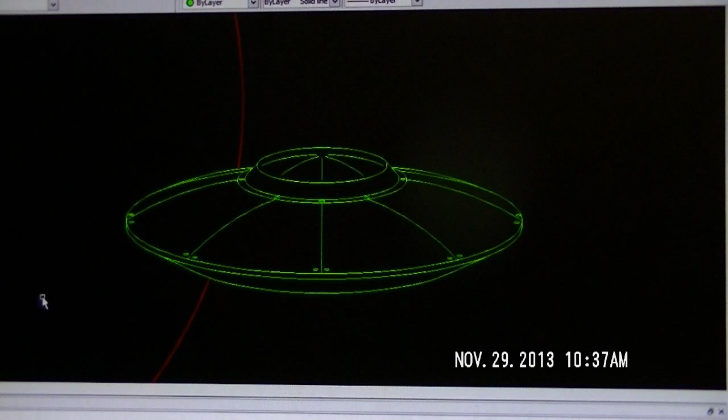And I got these visions of these dual magnetic hemispheres. They're like toroids, counter-rotating. And I got the images of these sacred geometries again, predominantly hexagons. And so when I got out of the dream, I came into my room, where I got my computer and all my design stuff, and I started sketching these designs, and they were based on what I'd learned in the dreams.

And I came to realize that it's possible that the dreams were a message to me. I know that sounds kind of out there, science fiction-ish and stuff, but our planet and our solar system is going through some really weird energy changes, and it's manifesting certain things in people that nobody can explain, and nobody certainly ever expected. And for me, it's always kind of been related to levitation. I can't tell you why.

But I sketched together my first design, which was a live shaft, a live axle, anchored at the bottom and anchored midway with bearings. This green rotor is a plate with neodymium magnets, north side up, south side down, two drive coils which are also on a rotating plate so that they can counter-rotate each other. And in my head, I envisioned these two toroidal shaped hemispheres of magnetic energy, magnetic flux.

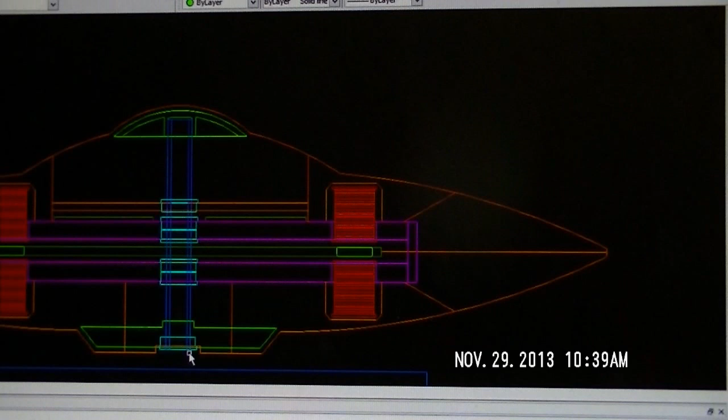I had no way to generate power, and I didn't know how to do it, but I did some research. Brown's levitation theory and that kind of stuff led me to believe that we can take power out of the ionosphere. We can create static, high voltage static electricity. So I incorporated at the end of this live shaft these, essentially they're static generators, north and south, or positive and negative. That Brown's levitation deal is based on potential, the differential in potentials between north and south, or positive and negative ionic energy.

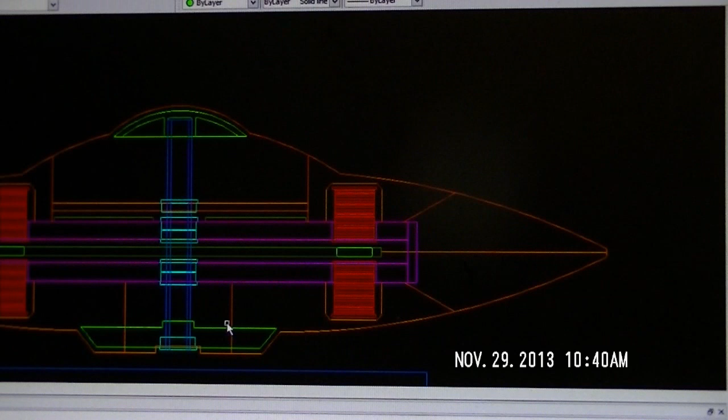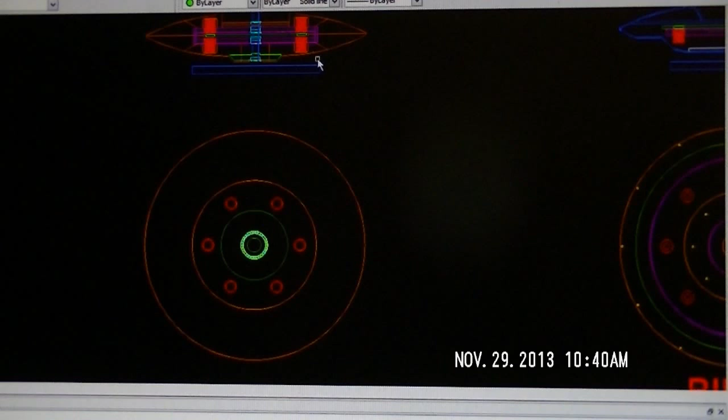So I threw this thing together, and I realized that I got these huge coils, and I had 6. This is the topography up here, and this is the plan view down here. I had hexagon positions, and I have all these coils rotating, huge centrifugal forces, and I need gyro, yeah, but that's just too much rotating mass.

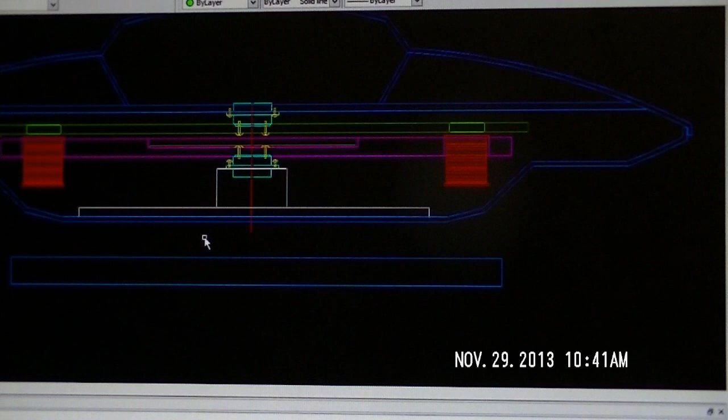So I changed to an 8-point where I had the coils still rotating in one direction, and the upper rotor plate with the neodymium magnets also rotated in an opposite direction. And essentially both of those things will give you 2 opposing toroidal magnetic hemispheres. But then I had no way to generate power in that design.

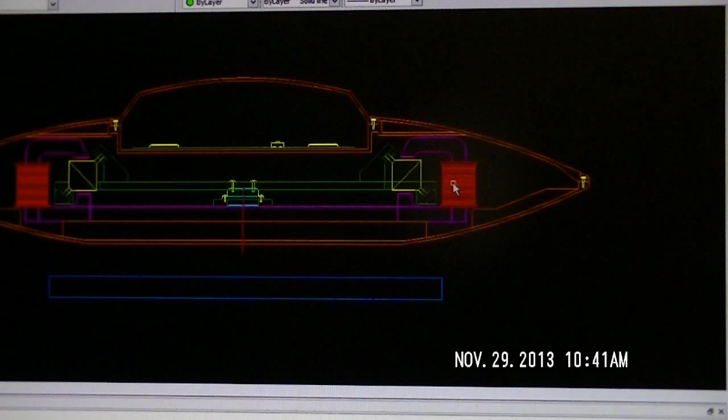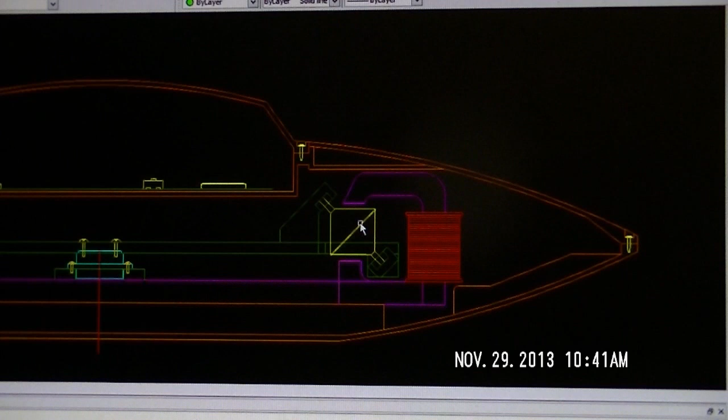I kind of did some more research and came across this guy named Otis Carr, who back in the late 50s and early 60s designed this Utron technology, where he essentially used ring magnets and coils and got this plate to rotate, and these little Utrons, they're opposing conical shaped rotary devices that generate magnetic forces in the opposite direction.

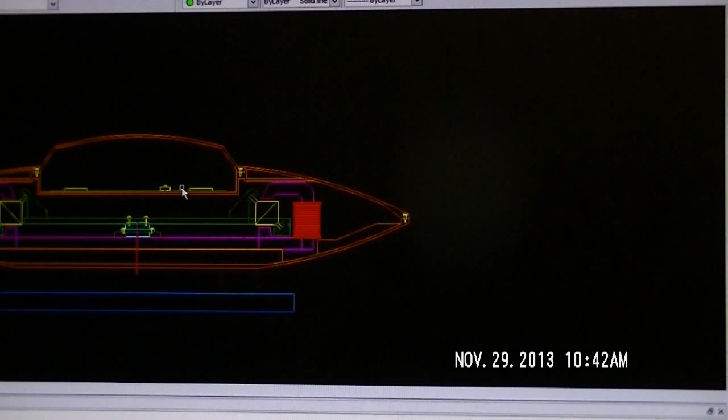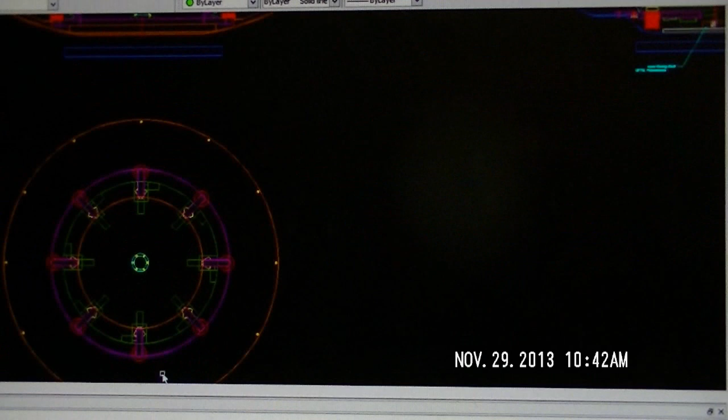And there was nothing concrete with this, and I just felt like I was kind of going down an avenue that I wasn't technically knowledgeable enough to pursue. Not like any of this is really. This is the plan view of it. It has 8 points based on sacred geometries, of course. You can see these counter-rotating Utrons.

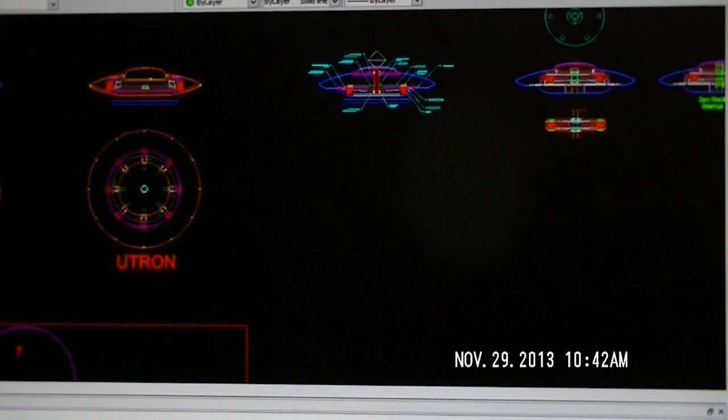Well, these other motors that I've been doing were based on either Bedini or pulse motor technologies. Then I got to this other idea where I had a center rotating mass, and this is to create a gyroscope, which is a stabilizer. If you're going to have a spaceship, you need a gyro. Just about anything, even ships on the ocean have gyros to compensate for the rolling motions of the ocean and stuff.

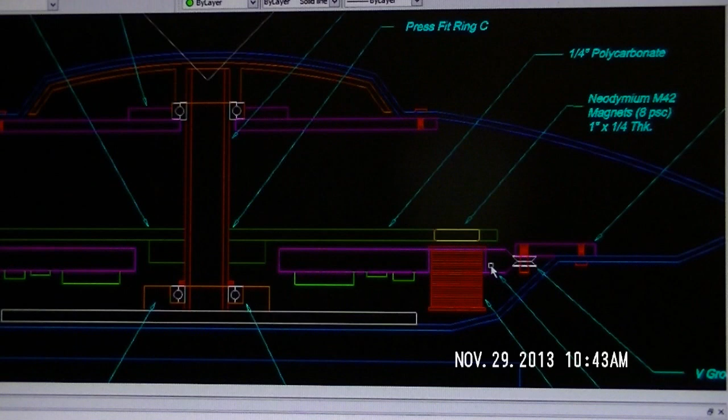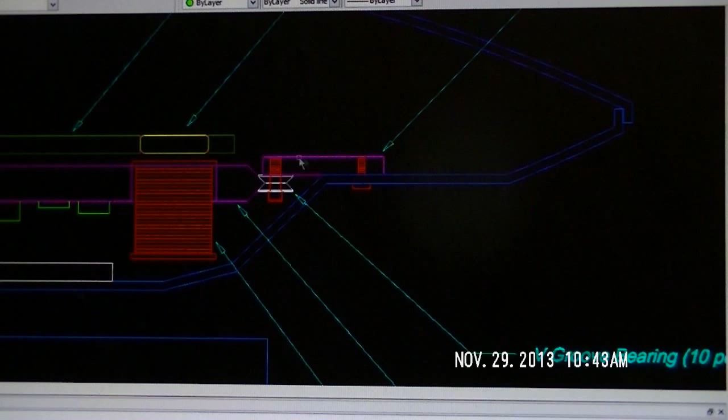I had this one plate as a gyro, and another, the generator coil, was also a rotating mass; it's essentially a big ring. This is a big plate, aluminum plate. This is a ring, I was thinking probably polycarbonate. And then this is an aluminum ring that goes around the whole circumference. And then I have V groove ball bearings that hold this ring, the drive plate coil ring, in position.

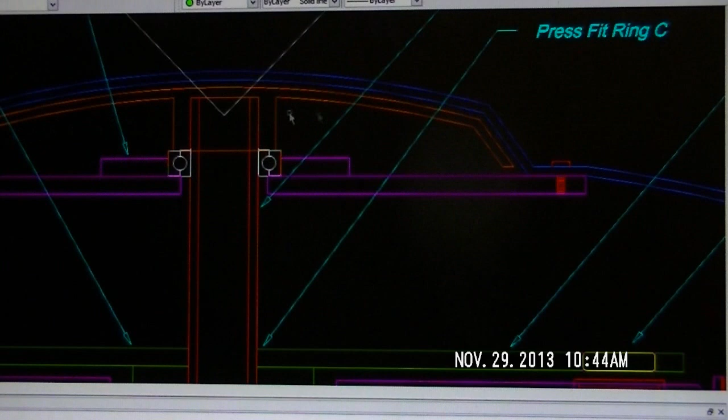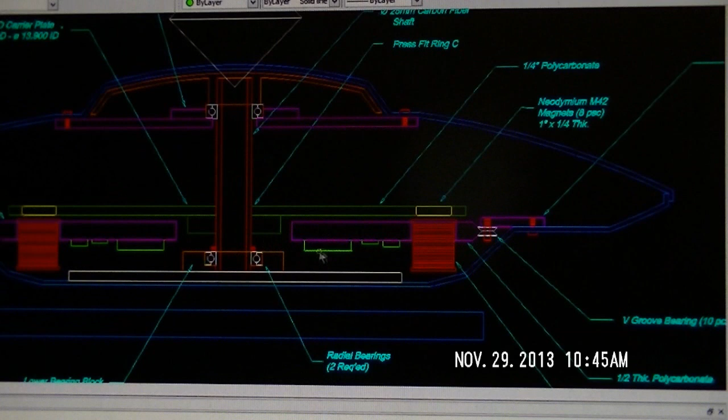And then I have a static electricity generator up on top, and I was thinking about a plate capacitor on the bottom. This is a viable deal, but I think I would probably incorporate a northern hemisphere negative or positive ionic propulsion or static generator to capture ions from the north, and then of course you need a south to generate the current to go into this plate, and then through induction I would somehow get the power to these coils.

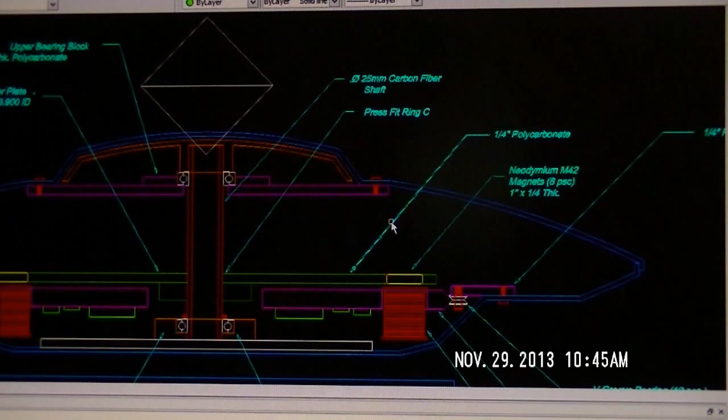This is not a trip, this is a journey, and I've got a lot to learn, and I'm just at the initial stages of putting this stuff together, all based on half-assed theory that I learned through reading and through all the different stuff you find on the internet.

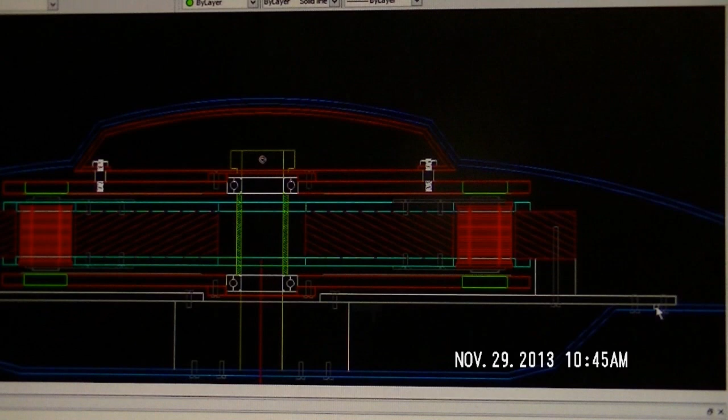And so I gravitated to another design which I thought was a little bit more viable because it gets rid of the rotating mass. I have a single drive plate, which is this red section. It's mounted to the fuselage on a big plate that's in the interior of the ship. On top of that insulator, I have two aluminum plates. And this is a hexagon, so we're back to a 6-point geometric shape. And now I have an upper northern rotating plate based on the northern drive pulse, the northern portion of the coil, and then a counter-rotating southern plate with neodymiums rotating in the opposite direction.

And using this upper large static generator, I was going to try to transfer that static energy into these two upper plates, kind of like plate capacitors, and then somehow incorporate the electronics within this hatched area of the insulator so that I can achieve the proper frequency.

I've come to learn that pyramids were not built as tombs. Pyramids were based on ancient technology, much more advanced than anything we have, because pyramids are actually power generators for advanced civilizations that were here before us. And the very design of these pyramids uses the ionic energy between our ionosphere and Mother Earth, and at a certain percentage of the height of those pyramids, some researchers have recently measured a resonant frequency associated with this energy generation, and it still happens. They still generate the power. The ones in China, the ones in Bosnia, every place they have these pyramids, they still work.

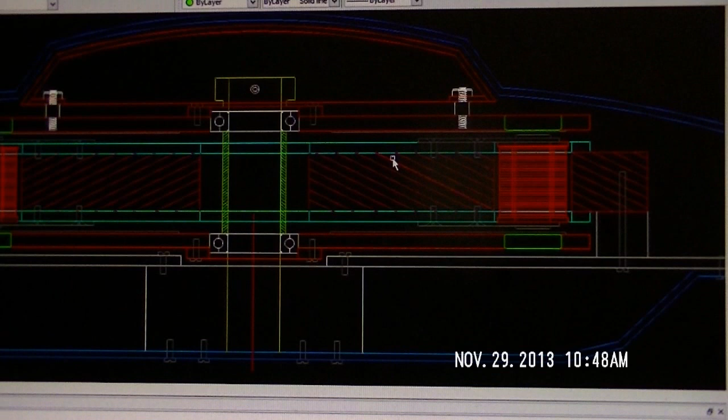They actually had underground rivers flowing through there, and they create this energy. And they measured at a certain point of these pyramids 28 kilohertz. So the resonant frequency of these pyramids activates at 28 kilohertz. So I figured that I would pulse these coils in a dual phase at 28 kilohertz. Of course, that's why I bought a function generator, so that I can play with the frequencies, because just like John Hutchison, when he did the levitation, he used acoustic resonance to levitate and to change matter.

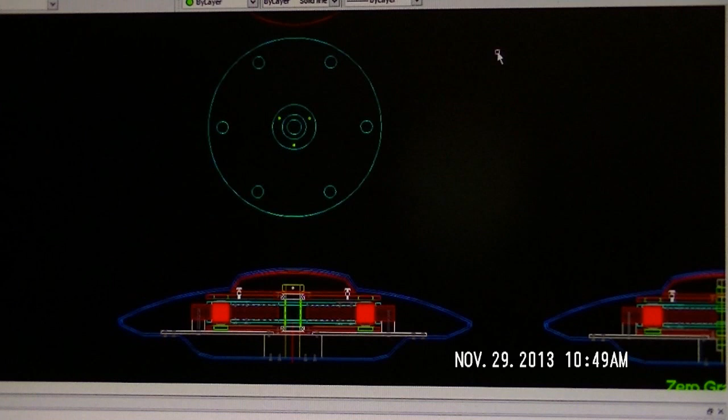So along the same principle, it's possible, I think, to achieve electronic modulation levitation by achieving the resonant frequency of a given mass. Like this whole spaceship would have a combined resonance frequency that, once it sustained that right frequency, would counteract the gravitational force. And that's essentially the theory behind what I'm trying to achieve.

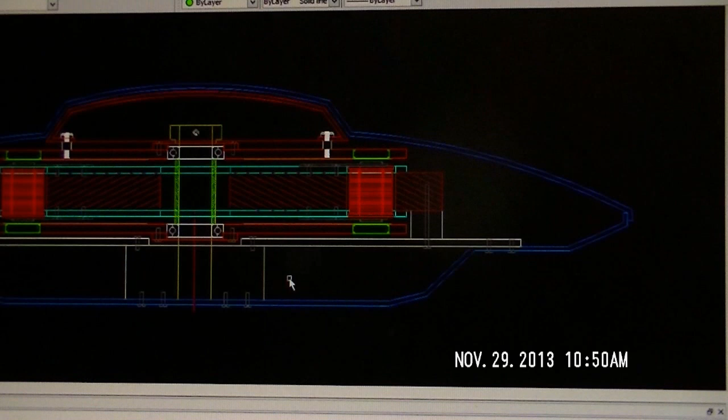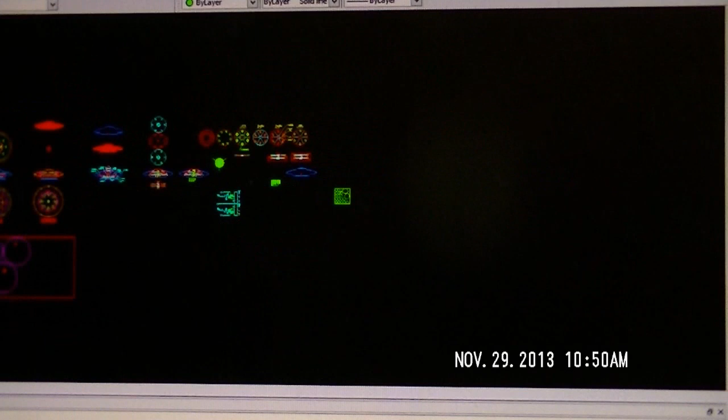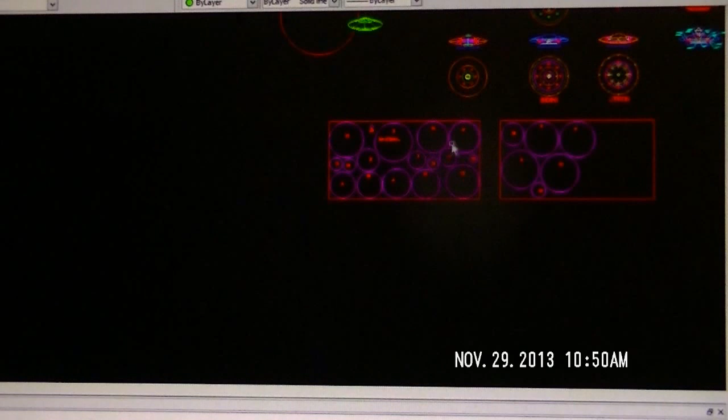And so I've been building some of the components, some of these plates and stuff. But then I was like, well, how am I going to build the craft? And as I was waiting for parts, I decided I was going to go with a piece of 4x8, quarter-inch thick masonite, heavy, real dense wood. And I cut all these diameters out, and they all have the same exact central pinhole. And then I stack all of those diameters up on a central pin, and it gives me this serrated edge.

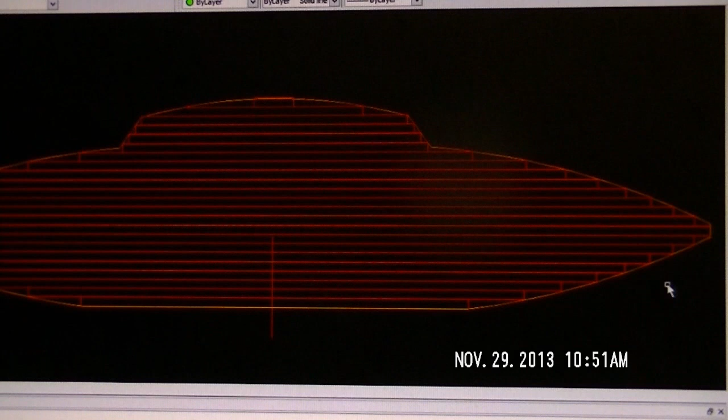And then by using mold making techniques, I could create a mold that I can use to make an upper and a lower half of the fuselage. And I've done that, and so to create a prototype, I built a fixture that solidly mounts the shaft in the fixture at the bottom and at the top.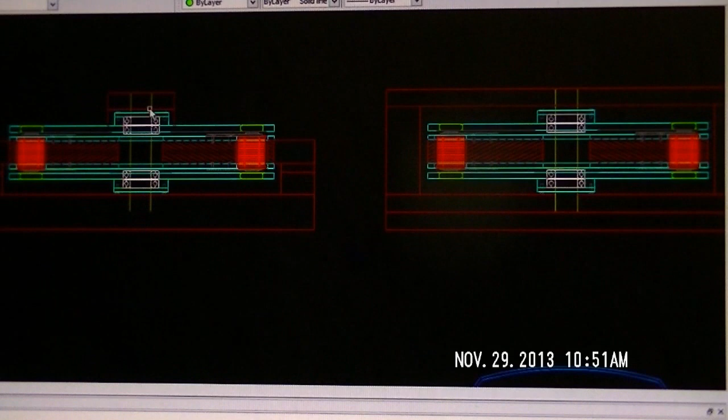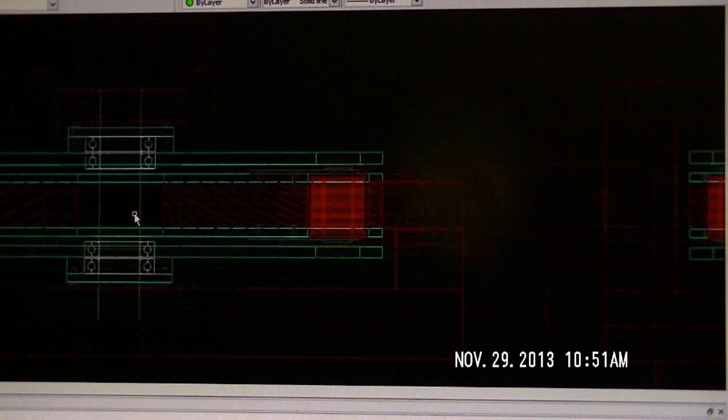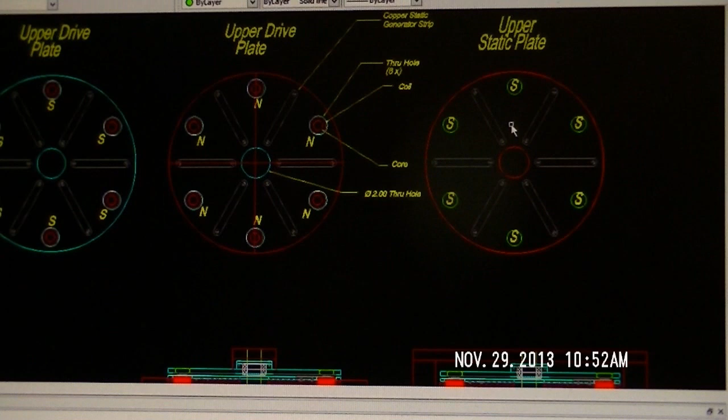And this is one angle looking at it, this is the other angle. And I use dual bearings on the upper and lower plate to maintain stability in the plate. And I was going to try to create static electricity with these static plates. I got an upper drive plate, a lower drive plate sandwiched in between the insulator. The upper static plate over here is the northern hemisphere, and I have plastic over it with the Wimshurst conductors, and then of course a southern lower static plate.

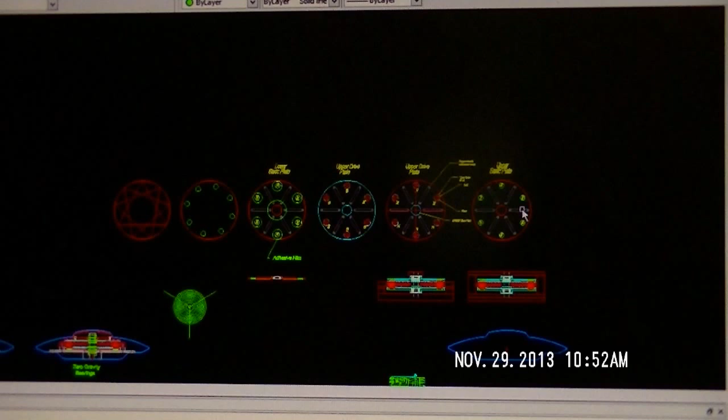So you can see I've been pretty busy. Here's the circuit, the drive circuit that I'm using. It's based on a FET. I have pulse width modulation going into the FET. Channel 1 in, channel 2 in, and then I have channel 1 out so I can monitor my wave function and the relationship between the northern and the southern plates.

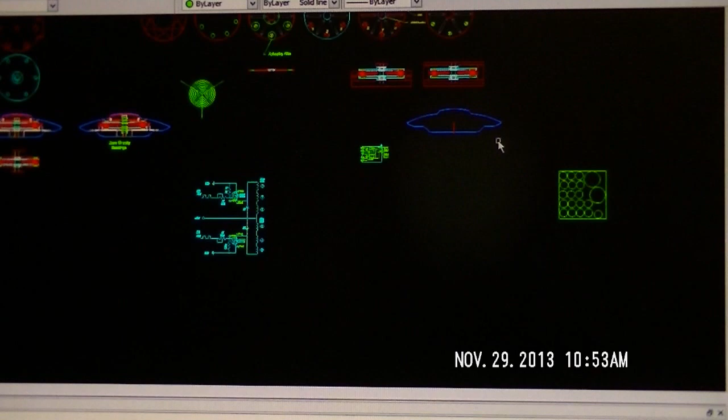Then I got the coils, 3 coils in each cycle. So it's a phase rather, in each phase. So I have three coils for phase 1 and 3 coils for phase 2. Kind of looks like this. Pulse width modulation into the resistor, into the gate. Force of 12 volts through the coils. It looks like I have this diode backwards. Like I said, it's a journey and I'm learning a lot. But let me show you what I've done so far. And I'm going to move the camera, so bear with me.

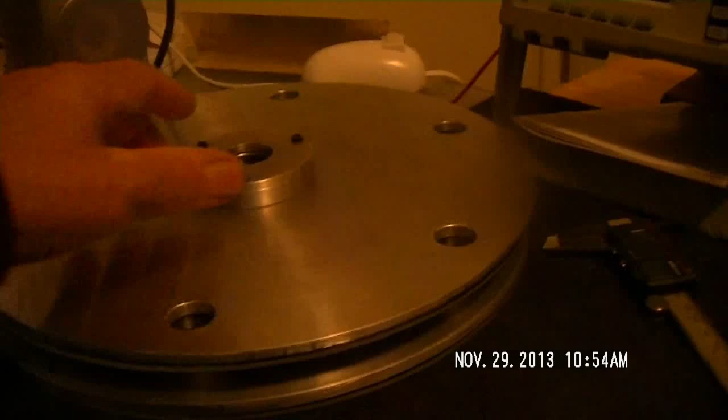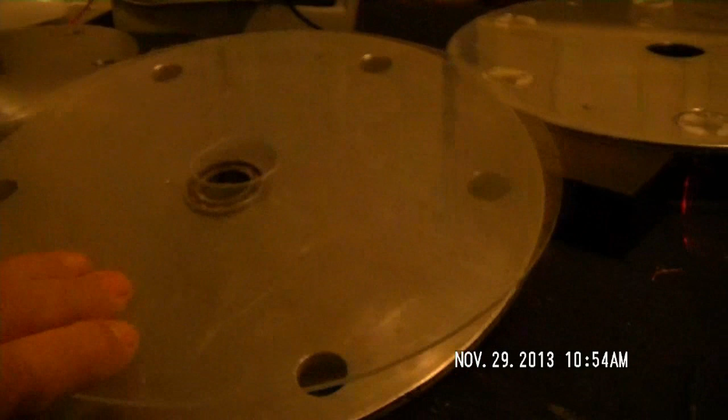These are rotors, the rotor plates, and they have plexiglass on them. I'm going to use a high-tech pressure sensitive adhesive film in between it, and then once it's adhered to it, I'll be able to just push the neodymium magnets. And they're pretty powerful neodymiums in both the northern plate and the southern plate.

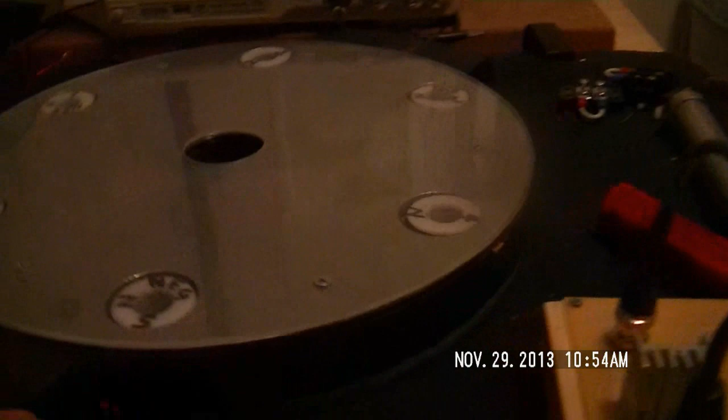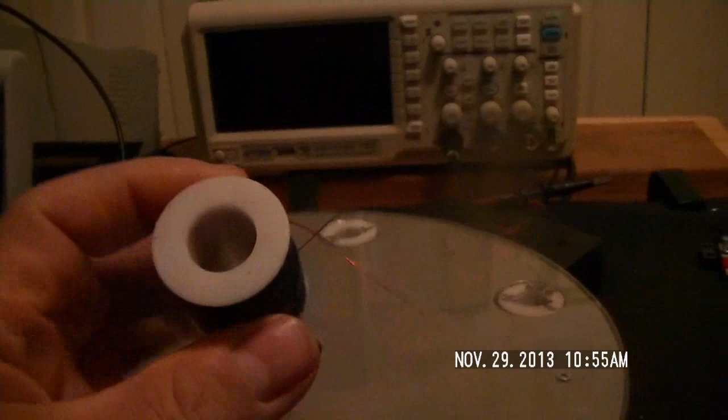This is my drive plate. It's got a 1-inch thick insulator and then a 0.2 inch thick aluminum plate on the upper and the lower. I'm going to try to use those as capacitance plates. And then I have the 6 coils, and they're essentially drive coils. They're 1.25 inches long, 1 inch in diameter. And there's 6 of them. They're around 6 ohms each. And I'm going to pulse coil 1, 3, and 5 as phase 1, and then 2, 4, and 6 as phase 2.

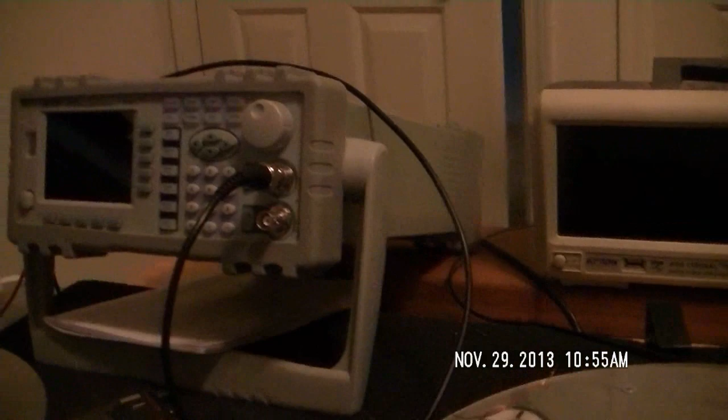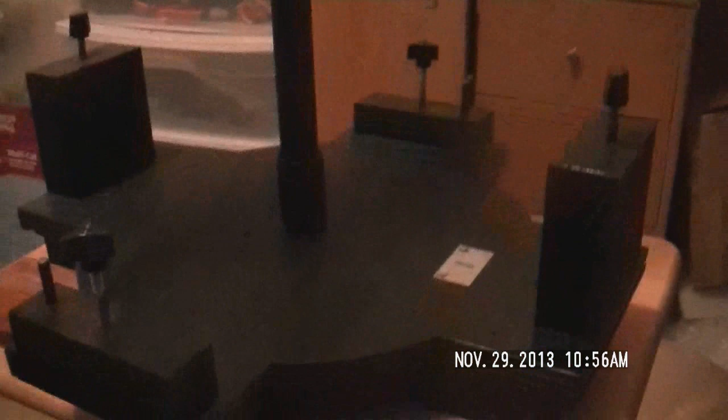With the 2 outputs, I bought a new function generator. It has 2 triggered outputs. And then I'll interface this board, which is power MOSFETs. I'm still waiting on a couple components and stuff, and variable gate trim, and this is the housing, or fixture, whatever you want to call it.

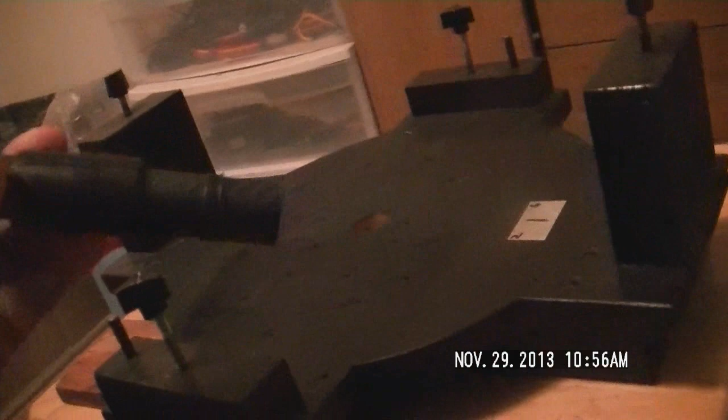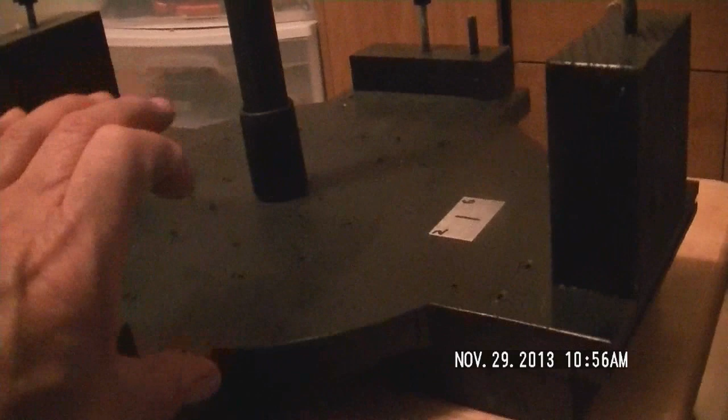This is this shaft. Everything's going to line on this shaft, and this shaft is carbon fiber. That way I don't have a bunch of electricity shooting around, or short the capacitor out in between the capacitor plate levels. The drive plate is hard pinned to this lower mounting position, with the 2 stator plates positioned above it with this spacer holding them relative to the drive plate.

So like I said, it's a journey, and I'm just kind of getting to the fun part where I can start doing stuff, making things move, trying to develop the technologies, and I promised a couple guys that I was going to share an update on where I'm at, what I'm doing, and that's essentially it. So, like I said, it's a journey.

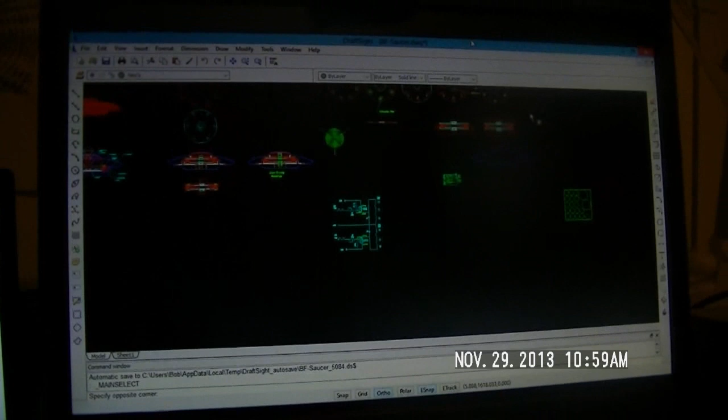If we can keep the CIA out of this and not get in trouble, that'd be a big move. But I don't think I have to worry about that until I start getting this thing off the table.